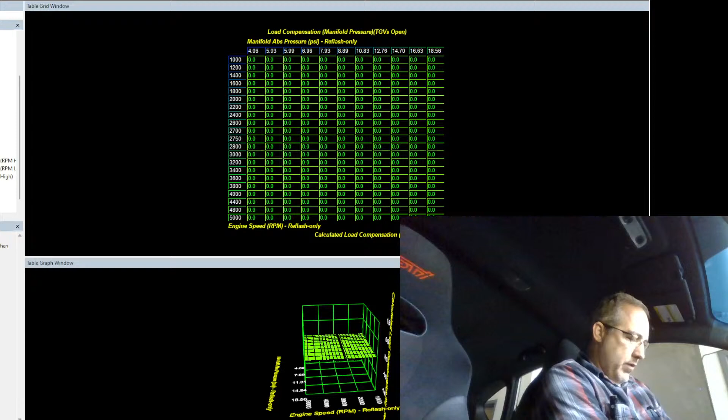Wow, my watch didn't charge last night. It says it's dead now. Okay. Hey, man, how's it going? Dino is one of the students in my Discord. So, welcome. I think you've only ever caught, like, what, one live stream before? And man, something's really in there. What time is it where you're at? Like, you're in, what was it again? United Arab Emirates? Is that where you were? UAE? Is that like 16 hours ahead of us? 8, 9, 10, 11, 12, or maybe 13-ish. I'm trying to think of what time zone that's in. But that's quite a bit ahead of me. Because what's 8 to Greenwich, and then yeah, I think there's like 5 more time zones to you, I think.

So, welcome. So this is like I said, 2012 STI. It's got just the Cobb stuff on it. Like that's it. Not a whole lot of stuff going on with it really, and that should make it fun.

2240. Really, that's it? Okay, so it's 11. 10 hours. Really, only 10 hours to UAE from here? Hmm. Okay, 10 hours. For my thermodynamics class. Nice. I wish I could read what it says. This YouTube thing puts this thing. First law analysis for engineering devices. Okay. Yeah, so my chat window has this emoji button, but it covers up what people write. So I often miss half what they say until someone else says something to push it up so I can read the whole thing. It's dumb. So GMT plus 3. Okay, right. And I'm 8. So that makes sense. So 11. Wait, but it's 2240. Oh, maybe because daylight savings. I think I'm 7 now. That makes sense. All right. Sorry guys about the phlegminess there. Something's really bugging my throat. I just ate, so apparently something I ate is getting at me. So anyways, here we are.

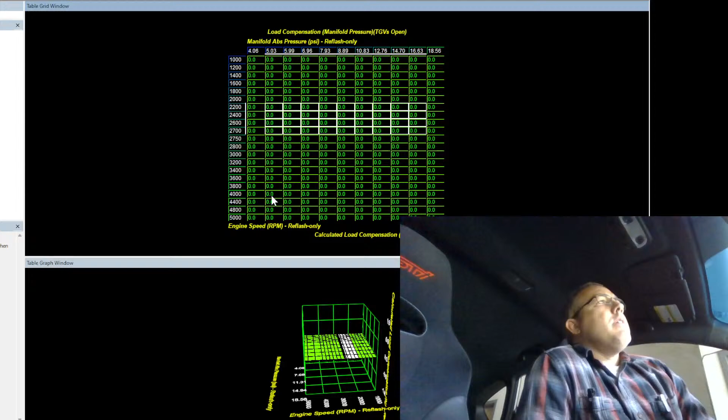But what's interesting though is as you change injector size, the RPM changes. So, like 1050s, the leanest spots usually like in the 28 to 3 range, and then 1300s, the leanest spots like the 22 to 26 range, right? And as the injectors get bigger, that spot kind of moves a little bit, and so the resonance is affected by that. And if you think about that, that kind of makes sense: if the injector is open for a shorter period of time, it's going to change the resonance. Now, I would think that a shorter period of time would be a higher frequency. How does that work? I guess the frequency is the same. It's just the duration of the pulse width.

So, anyways, yeah, it's interesting to think about the resonance in the fuel rails. But because this fuel rail has a large volume, and with the large volume, it also has the large dampers in the rail, and then also has a larger diaphragm and larger regulator, the resonance is pretty much a non-factor. Now, what I did find interesting though is for some reason this one has a fuel pressure rise that is higher than typical.

It's got a 4 regulator, and usually when you increase fuel pump speed on the 4, there's almost no increase in pressure. But this one there is, and it's like 7 pounds. So that's intriguing to me. It makes me wonder if it's the regulator or if it is the fuel basket, right? Because a lot of these that we put the regulator on have the Radium jet pump in them, but this one's got a factory jet pump in it with the 4 regulator.

So I'm curious if I was to log pressure in the return line after the regulator, if I saw that it went up, because I know that it does go up. I'm curious if that's the issue that we're seeing, why the pressure is not as steady as it should be. So that, or because this car has the regulator mounted to the driver's side rail. It was a different way. Lane wanted to give it a shot, so it's basically on the rail in one of the ports off the side of it. I think one of the damper ports or something.

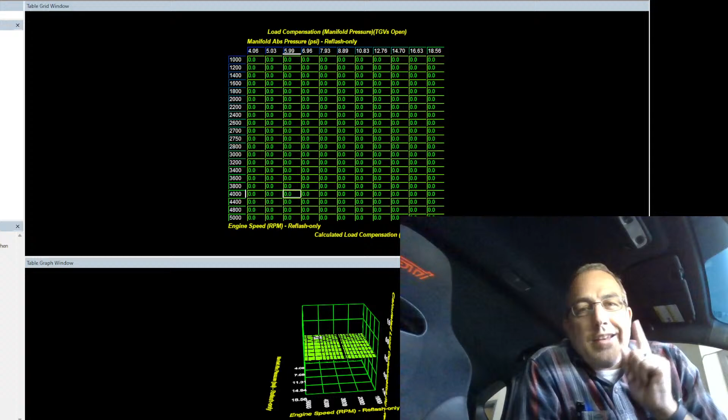I got a question. Anyone know how to log out of one email account on your freaking Google? I had a customer use my laptop. He logged in his email to get something, and now his email always logs into my shit. But the only option I have on Google is to log out of all email accounts. I don't want to do that. I just want to log out of that one and stop having this guy's email pop up on my screen. It's really weird. I don't know why these guys gotta make everything hard. They think they're making it easy, but they're making it hard. Really, in this modern age of convenience, things are really inconvenient.

Okay, so now in here I have a base map. Nothing fancy, just some regular values. I did forget to zero out the wastegate duty cycle though before I started this, so let's go to wastegate duty cycle and zero that out now. Zero that out. Like I said, this is a base map with some generic values in it from a previous tune, and we just want to see that everything is working.

Oh shoot, not even connected. I screwed all that up. Turn this off. Let me save this. Save that. That's one thing I really dislike about this Cobb system here. The fact that you have to disconnect to do certain things and reconnect to do other things, it's just super annoying. And then this whole thing, I don't know if you guys see the initializing tables, it's always initializing tables. When you're not connected to the freaking computer, the ECU is still initializing tables. It takes forever. It's so annoying. Now, that being said, it could be this laptop. This laptop, while it's new, has been very problematic.

One of the reasons that I haven't been streaming lately is I've been gone a lot. And I was just in Denver on a car, and the first day was effing miserable because my laptop would not talk to the Motec correctly. It just wouldn't do it. It was weird. I would have issues where all of a sudden it starts idling really poorly. I'm like, why is it idling so bad? What the hell's going on? I didn't break it. I was just checking this feature, and I can't find anything that shows me why it's idling poorly.

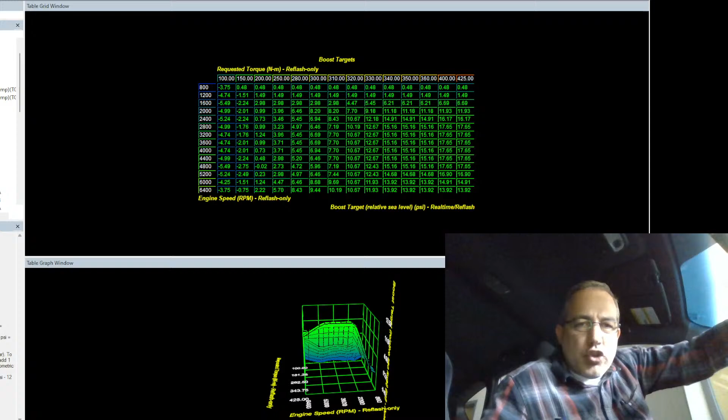Okay. Oh, I don't think you can see my log window. Let's see. You cannot. Let's see if I get the Cobb logger. That's not the Cobb logger. I get the Cobb logger for you guys. This one? Here we go. And then we bring this up. Why did they get rid of that button? I used to be able to click on it to bring it up. Now I have to drag it up. Ugh. There it goes. All right. I'm gonna slide this down right here. Like that. All right.

So I'm looking at this here. First off, it strikes me as odd that I have total trims of 5 point something. So that's the combination of my instantaneous correction and my learning. You'll see my learning is -6, therefore my instantaneous correction is like -1, and my total is -6, -7 now. Now that's kind of weird because I have the Cobb data, I have all that stuff in here for what this car has, and I also have the fuel pressure comp.

But the fuel pressure is only 0.1 or 0.2 higher than it's supposed to be. So I don't really see why I'd have 6%. Now I'm not too worried about 6%.

To be honest with you, I try and tune all my cars like 3 to 5% rich, because basically the idea is if something happens and it goes open loop, like an O2 sensor fails, I don't want it to be so close to stoich that it can be lean and misfire. So I do everything like 3 to 5% rich, so that in the event of sensor failures or issues, it just goes a little rich, and the car is not misfiring. They run really smooth and nice. And I let the closed loop system pull back that 5%.

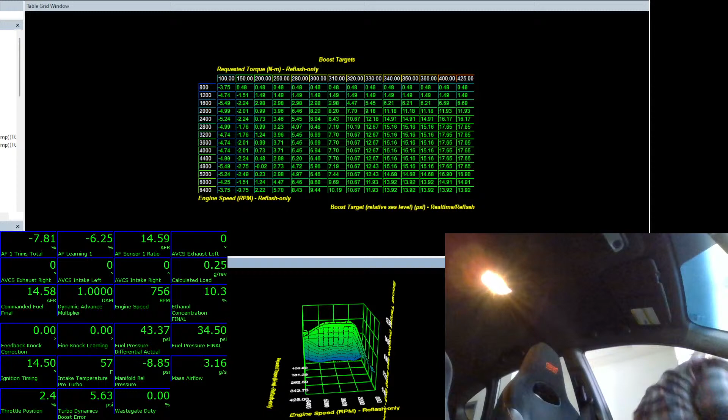Did I shut the front of this down? I don't think I did. I don't remember shutting the front down. Did someone else do it for me? Apparently I did. Oh yeah, I was talking to that kid on the phone. That's why he called me.

Okay. So you want to talk about conservation of energy? Somehow I am making more energy than I'm using in that person's world, right? And I'm pretty sure I've looked at the compressor maps and turbo maps of a lot of turbos, and not a single one of them was over 100%. I mean, that would really be something, right? Now, they've had vehicles with a VE over 100%, but that's for a supercharging effect. That's usually because there's resonance tuning associated with that.

But it isn't like, how do I say this? But you lose a lot of that, and it's usually in the realm of like 3% of resonance tuning is what you can get, like 3% more air fuel or volumetric efficiency. Well, that's rich right there. 12%.

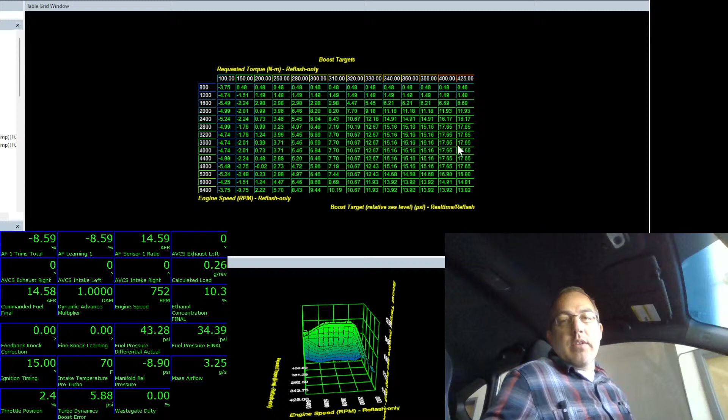Yeah, see, the log is fine. Fuel pressure is within half a pound the entire pull. Ignition advance is 12.5 at peak and 26 by redline, which is fine because we're talking a whopping 8.5 pounds of boost. Boost is 8.8 pounds at redline and 9.85 at peak torque. Again, we're at wastegate pressure on a stock turbo and all that, so that is good.

Throttle is 100%, but I'm still really rich. Okay, well, let's see. Did I check? Did I even bring out my open loop table? Probably not.

Open loop table is set to be 10-1. Okay, well, there we go. 10.12 at the top end and 10.5 at peak, between 11 and 10.5 at peak. That makes sense. Makes sense. Oh, other names popped up. There we go.

My mic is cutting out a bit. Fixed itself somehow. Maybe because it was clipping and I turned it down.

Maybe that's why. No BOV, like it's capped off. No, this has got a factory valve on it. Yeah, no, it was a freshly installed one. I watched Lane install a factory bypass valve in this thing, in the hose and all of that.

I was wondering, but I've seen a lot of discussion between people just not running any kind. Yeah, I mean, you can do it. You can absolutely do it. I mean, it's not beneficial. I mean,

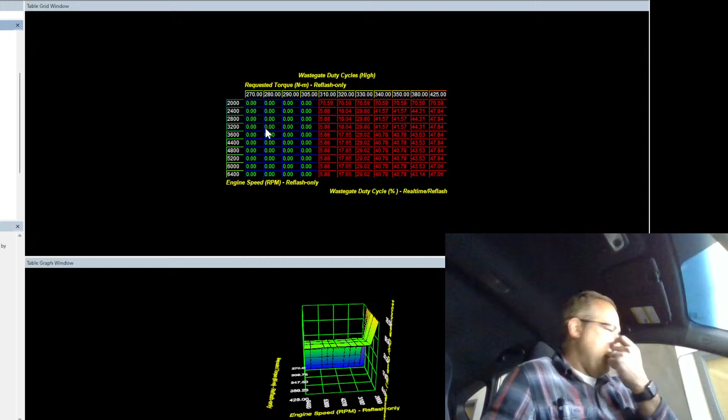Wait, I just got 8 pounds of boost, and I had my wastegate duty cycle. I thought I said it's 0. This says it's not, this says now it's 40 something. What happened? What's going on? Oh no, I don't understand what's going on here. Did I do that? But now I'm concerned. What did my log say it was? Wait a second, because that means that if it was at 40 and I just got 8 pounds of boost, something ain't freaking right.

Let me go find that log again. What do I do with it? Man, I got a freaking sciatic nerve pain going on. It is hurting. It is a hurt.

Holy shit, I hate Windows 11. Oh man, so bad. Where did my documents folder go? Just gone, we don't care. You need a documents folder? Who needs that shit? All right, it's not. Jesus fuck, did I say I hate Windows 11 yet?

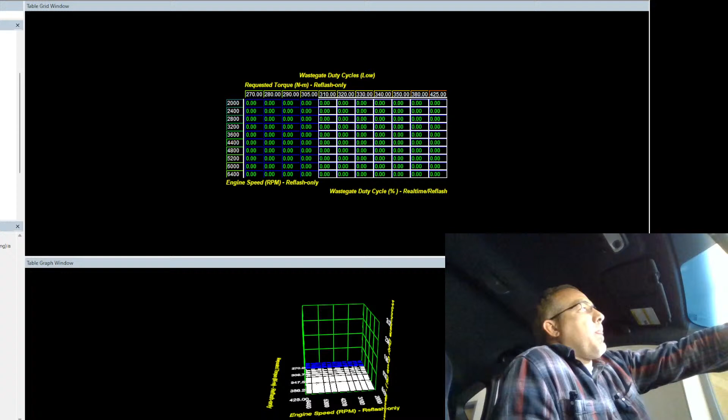I'm a little disgruntled lately. I feel like I'm in a fucking hell loop, to be honest with you.

I did another podcast with Flatirons Tuning day before yesterday when I was there. Real short one because I had to catch a flight, and we were talking about some cool stuff. I thought I disabled OneDrive in 11, but I don't know how to fully disable it because they don't want you to, so it's just fucking miserable. But yeah, so I'm at Flatirons, I did a 45-minute podcast with them, and we're talking about the industry, engines, and all that.

But at the very beginning, I said something I've been keeping to myself for a while, and I want to talk about it a smidge. I do not like how fragmented our industry has become, how it's turned into all these little factions of misinformation and ego. I am actively working to bring some unity back to it. I don't know if it's going to work. I know society is becoming very fractured and kind of broken.

Facebook has pretty much single-handedly ruined the car community by taking away from forums. If you think about it, before, if I wanted information on a Subaru, there were a few forums to go to, but the obvious one, the largest one, was NASIOC, North American Subaru Impreza Owners Club. You'd go there and say, I want to know about my turbos.

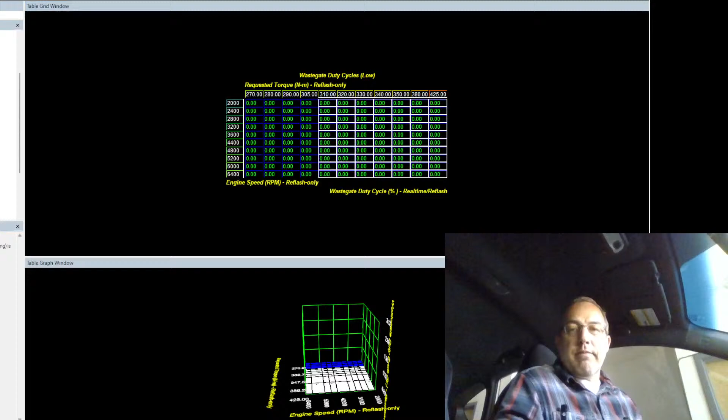You know what, I'm gonna take this duty cycle and go really high, just real quick. I'm gonna give it a little bit of throttle and see if my boost even goes up, because the fact that I had basically wastegate pressure at 39% wastegate duty cycle makes me feel like my wastegate's not getting power. And that's where that part of the hell loop comes in too.

Every car's got a freaking issue for some reason. Oh, I got 12 pounds. Wow, 38% gave me 9 pounds. That is concerning. So does 100% give me 12 pounds? That is also concerning.

Wow, okay, why is that not working? God damn it, fuck you, Windows. Oh, apparently it didn't register when I hit it. Let's try it again. Log. There we go.

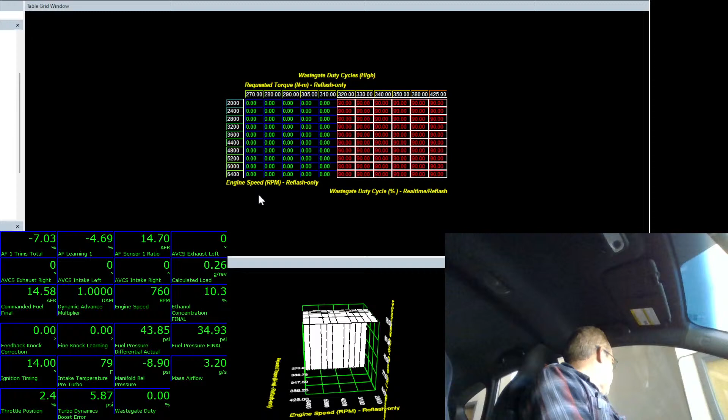Wow, that's not beneficial. Alright, so clearly I have a boost leak. I don't know how bad it is, but clearly I have one, because I've got 70% wastegate duty cycle and I'm hitting 12 pounds of boost, and my air fuel ratio is richer than balls. Here's 70, 67, 69. To get to 14 pounds, that is a lot of duty cycle only at 14 pounds. And I realize it's the factory boost control solenoid, the factory boost control lines, so it's not going to be the most responsive setup, but that definitely concerns me.

Fuel pressure final, fuel pressure looks good. Yeah, okay, let's look at my math. Let's see if my math is off. Maybe it's not. Let's see what the math goes to. Oh, 247. And what did we make? 205? Yeah, I made 205. And it said 247 for my airflow. Now, 247 at 13, was this 14 pounds? Where'd it go? 14 pounds at 6,500.

That's actually not that far off, honestly. That part's not that far off. Still kind of trying to figure out what the hell's going on, though. Commanded fuel was still 10.5. Oh, that's right, because that wasn't connected earlier. Man, that seems like a lot of duty cycle to get no boost. Something's not quite right. That is for sure. Let me do a few more changes and take a few more logs and see what we get. Maybe I'll figure something out.

First, I'm going to do the fuel. Because like I said, right now my fuel is pegging out my air fuel meter. My air fuel meter only goes to 10. So, it could be 10, right? It could be a little bit above that, a little bit below that or something. So I'm just going to lean this whole section out. Just going to do a little smoothing action on it. Boom, big and ugly. Block tuning. Let's do some block tuning here. Leaning that a bunch. All right, so leaning that a lot. And let's see where it goes in the end.

It's not correct. Obviously, you see there's a big dip in there. There's a big hole at the top. All of that. It's not a well done fuel map. We're just trying to figure out what's going on here. I just want some data so I can. Oh wait, I think I heard a hiss. Yeah, I think I heard a hiss. Not a big one, but a little bit of a hiss.

215 it said. So 215 wheel horsepower is what I'm getting at the wheels on that last pull, and my mass airflow was 247 again. That's a big difference. I like that it was consistent though. It was 247 twice in a row. So if there is a leak, then it is a small consistent leak, like a hose not connected or something like that. A small hose. It's not gonna be a big leak. It's not gonna be an intercooler, end tank, or any of that kind of stuff.

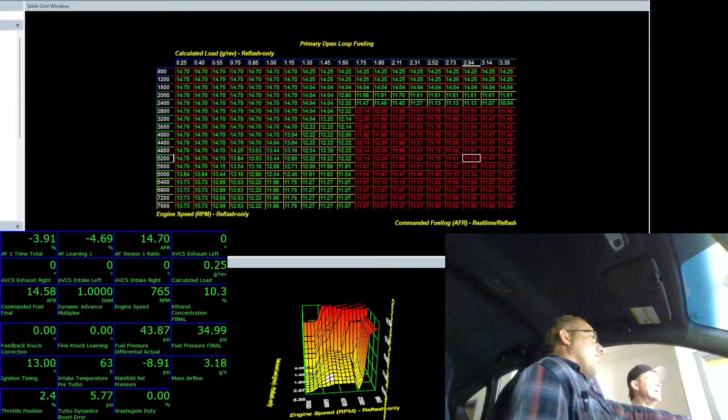All I did is pull the manifold off, pull the fuel lines off, and put the manifold back. Okay. I'll check it here. Injector? Maybe. I mean, no, because it would misfire at idle too, and it's not. No, he means like injector O-ring on the outside for the atmosphere. So I don't know. Talk to the guy. Think about something to come back.

Mark says, I think one of the big issues with how media generally is based on clickbait, with influencers trying to outclick each other versus just doing good, consistent work. Yeah, but you shouldn't be going to influencers as your primary source of data. You know what I mean? I guess it depends on the data. Right now, you can ask me a question and we can talk about it because I'm live streaming. But most influencers don't live stream. Most influencers are there for clickbait, but they don't also provide all the data, right? I don't know. I feel like it's just a matter of the database is corrupted, doesn't exist anymore.

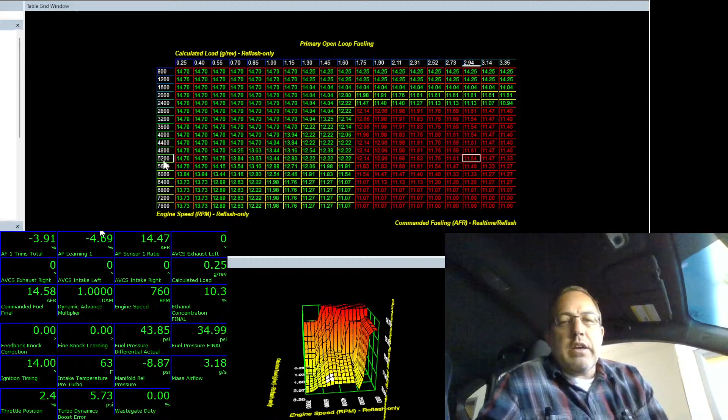Now again, this does have the factory boost control solenoid, so it does take a little bit to duty cycle through stuff. But I've got my fuel map here. I'm gonna check a few things. Let's see. Ethanol says 10.3. Injector scale is 2658 at 0%, which puts it at 2764 or whatever at 10%, which is where we're at. Latency is correct. 14 is 0.92.

That is correct. MAF calibration. It is an SF. It goes to 501. That's correct. 103 here, 501 there, and the smooth curve. Yep, that's an SF cal.

Those are the biggest sources of fueling, right? Immediately right off the bat. Let's check. Minimum's 0.4. Well, that wouldn't affect us on the top end. And it looks like the right curve for my small pulse width. That's all normal there. This should be zeroed out. That should be zeroed out. Up top, it's not zeroed out on bottom, so I need to zero that on the bottom too.

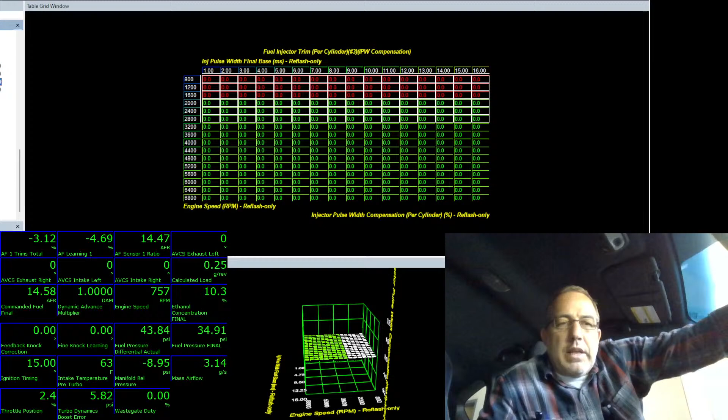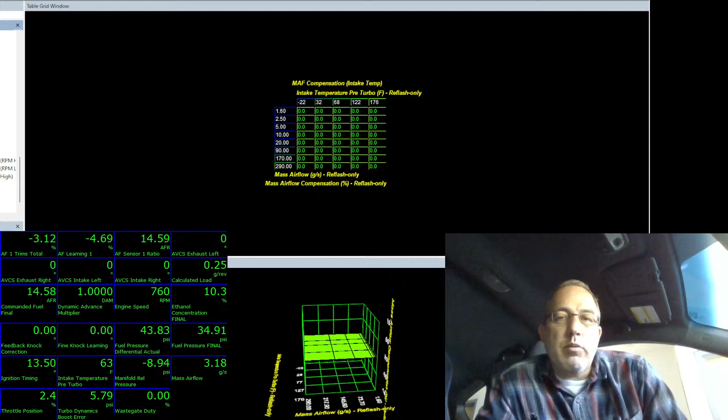I realize the significance of saying you shouldn't be relying on influencers to get your information, and then people ask me stuff. But I wouldn't consider myself an influencer by any stretch. And I've been here the whole time just to provide a service more than entertainment. Yeah, I've got a couple funny videos, but overall, comedy and click stuff isn't my primary method. I mean, I wish I had a larger following, and I wish I had more reach than I do, just so that I could help. But my motivator for doing that is to help the community and this information versus just to destroy things to get rich.

That's one thing I hate about some of the influencers, like they claim to be car guys and then they'll just ruin stuff on purpose for the clicks. And that to me is just so hypocritical that I can barely handle it. Like, what's an example? The Whistling Diesel guy that throws the engines on the hood of his R32s, and ruins two R32s because he didn't like the cars or whatever. That shit made me mad to watch, you know. And unfortunately, I fucking watched it.

So I contributed to their clicks, their watched minutes and that kind of stuff, which made them money and made it more likely for them to do it again. Which is why they do it, right? And because of that, I try not to watch that guy's videos. Sometimes there'll be a clip, someone like, dude, you gotta fucking watch this, and I might watch it. But for the most part, I don't support those people that behave in such a way that I think they're damaging our community personally. So I don't sound like an old grandpa or anything, but I wish that I could better reach people and educate people.

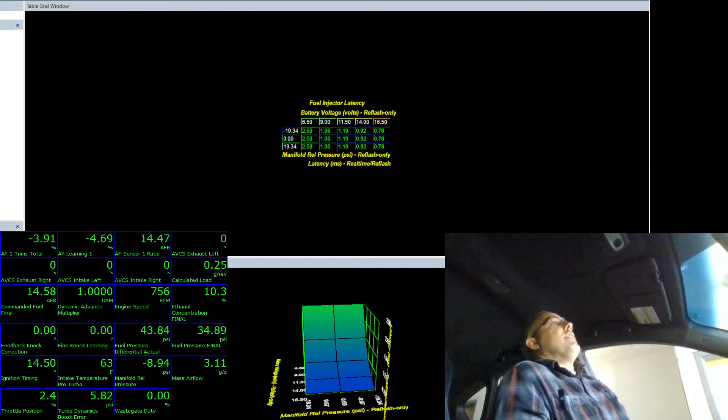You know, I smell a loose leak. Yeah, me too. Tom is an educator. There you go. More than an influencer. I try. I try. Obviously, I'd like to. You know, I wish I was funnier. I mean, I'm funny when I'm drunk. I think. At least I think I am.

But obviously, when I'm doing this, I'm focusing on giving my customer the best results, right? The best product that he or she can get, and that I can provide. That's always my goal. So right now, even as I'm blabbing to you guys, I'm thinking about this car, trying to think of other things that could be causing it to be so damn rich. It's just 1050s. Fuel pressure is correct. Everything is good, so it just seems like there's a leak somewhere. The problem is it's a small one, and probably not going to find out by looking at it. Probably got to pull the...

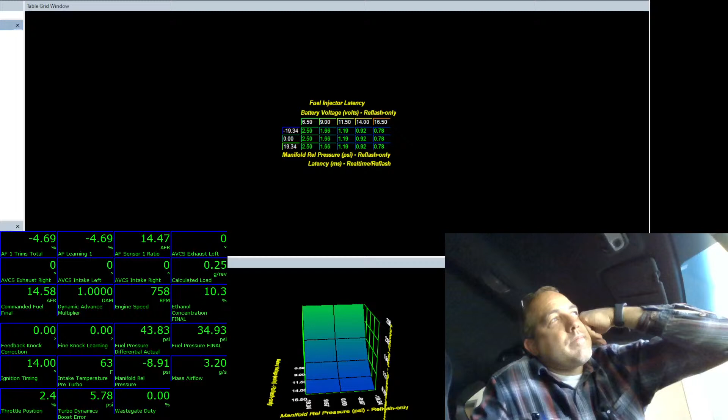Oh my god, this has a fucking inlet. That's right. It has a turbo inlet. That's really shitty. It has one of those Fuku racing ones. Ugh, so bad. So fucking bad. It puts the bypass valve hose all fucking kinked off, which is why the turbo surges a little bit. I think I'll get the smoke tester. God damn it. This is my hell loop. Working on cars that are fucked up. Dealing with this shit all the time. It's my loop. I just want to do cool shit, and I don't get that sometimes. I get to do stuff that has issues instead.

Now that being said, obviously it's not the fault of the guy who owns this car, whoever that is. I don't know anything about him. I just know that Tier 1 asked me to tune a car, and that's what I would do on this day. So I don't think the car is neglected or anything like that. I got to cover my ass, make sure that you guys know that I'm not saying screw this guy or anything like that. I just don't know why it is that there's always something wrong with these damn cars.

And I guess part of it is that unfortunately I care, right? Because a lot of tuners would be like, "Oh, that's off, okay," and then tune for it. You know, they tune for that leak, they tune for what's not right, and then they go on the internet afterwards and they go, "A true tuner makes anything work." No, no, a money-hungry con man makes anything work.

Somebody who cares about the product and their customer and doesn't want them to go broke because they got to replace their motor won't make just anything fucking work. He'll make the right thing work so that the car is more reliable, safer, and easier for them to operate, has good hot start, restart, has good cold start, has good throttle response, gets as much fuel economy as this setup is capable of doing. Not chugging off the stop sign, all that.

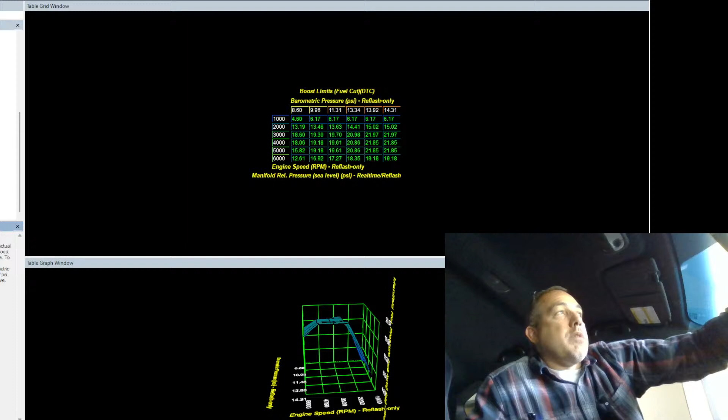That's what a fucking true tuner does. Money hungry fucking liars make just anything work. And yeah. Sorry, that's my little rant. One of the guys who considers himself the hottest thing since sliced bread, he said that shit on Facebook one day while posting a video of some car that I'm pretty sure I rejected because he had really bad component choices and shit, and who I'm pretty sure shortly after is paying for an engine build. So, yeah, a true tuner makes anything work for 2 minutes.

All right, I'm gonna go get the smoke machine and see about smoking this car. See if I can find a leak. Let's see, I disconnected. That's good. That's good there. Okay, so I gotta take the intake back off again, hook the smoke machine up, see where smoke comes out, hopefully find a leak. If not, we don't.

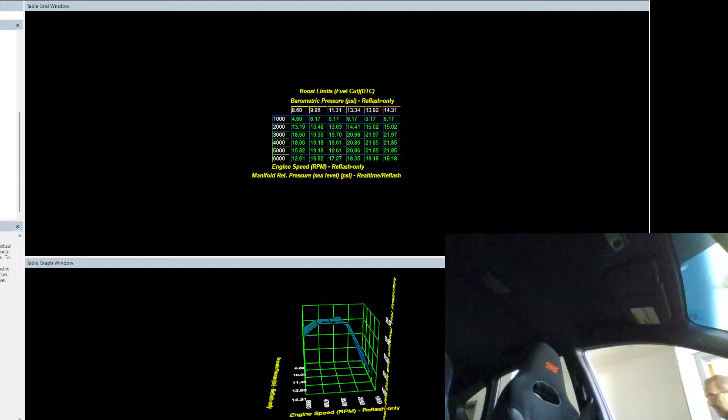It did come up nice and snug, but it was a little deep. Motherfucker. Worst thing I said was goddamn it.

All right, so let me modify the mods list now that I know that it has a 3-port. That's possible. It has a Cobb downpipe, which I wasn't told about. It has an IAT relocate that I wasn't told about. Luckily, none of those things hurt it. Now, these are 1050s, right? Not 1300s? Okay, just making sure. It's 3-port. Okay, turbo inlet. I knew that one.

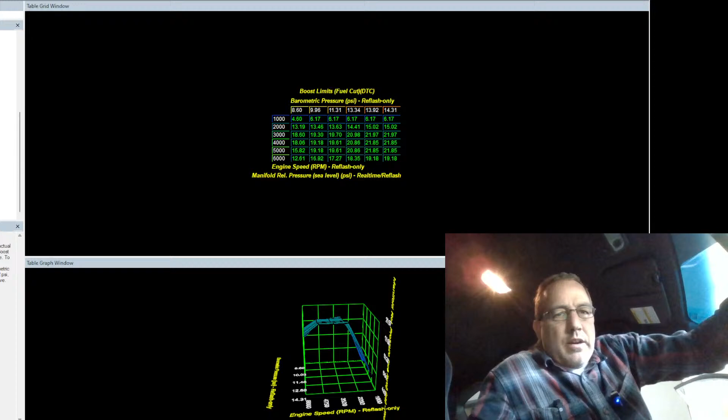All right, so definitely fucked up. To have a 3-port and need 70% to get 15, that ain't right. Especially to need 40% just to get 9. That ain't right. So all of that's fucked. So he's gonna smoke test it right now. But while that happens, I'm gonna go here to my wastegate duty cycle and change the duty cycle of the valve to be 20-some percent.

Boost control. Why is this one open? I don't want you open. Frequency. Boy, this software is the worst. We're at 28. Save. Okay. And then it's a GM IAT? It's the big brass one?

Another question too. Uh-huh. Did that guy with the Skyline, like Vlad or something, or Polowski or something, reach out to you? I feel like somebody with the Skyline asked me some questions. R34, like about a month ago. Yeah, a while ago, yeah. Never heard back. I know I responded, but... He's getting tuned right now down at KO. Did he go to the wrong place? He called us and we reached out to you. Now I'm wondering why. Yeah.

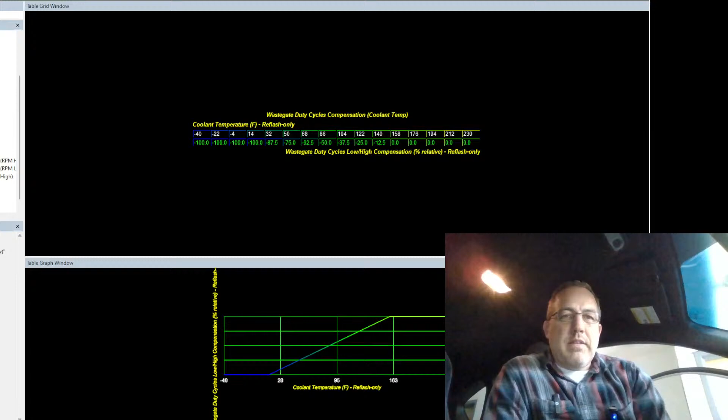I was just wondering if you complained about price. Probably. I mean, my guess would be... oh, he must have called me, not via email, because I don't see an email from him. Yeah, maybe not, maybe he never called me. It's all right, his loss.

That's fine. Yeah. He's not doing it? Too much money? Oh well, I gave him tons of options. I think the whole thing was too expensive. He was hoping he could get it done for like $3,500, and it was like 52.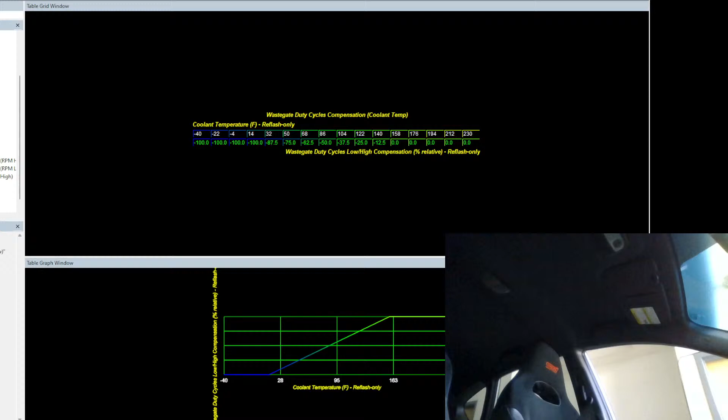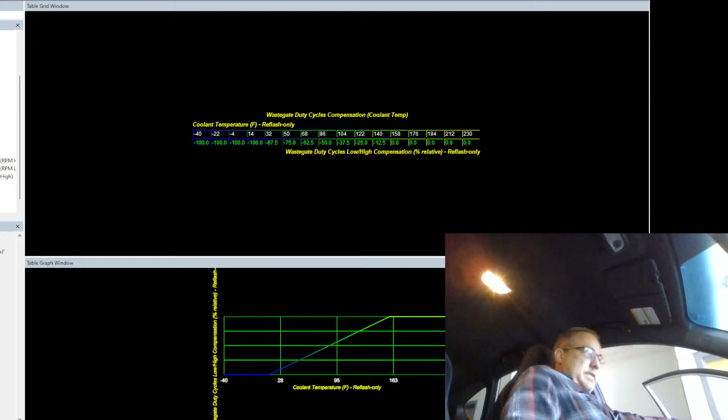All right, well for some reason there's no leak. So that's pretty crazy. It seems like a lot of not good stuff happening simultaneously that would imply that there was a problem.

All right, if you're still here, do you have the scale IAT from stock? For this sensor, yes, for this one you do, because it's a GM one and not my sensor.

Sean Tierney, if you're still in here, dude, how you doing? Dude, you gotta message me or call me or something. I know I'm old and all, but we used to shoot the shit all the time. Let's see. I wonder if Sean has my new number, that's actually something I should double check. I only have Sean's old email address, I don't have Sean's phone number.

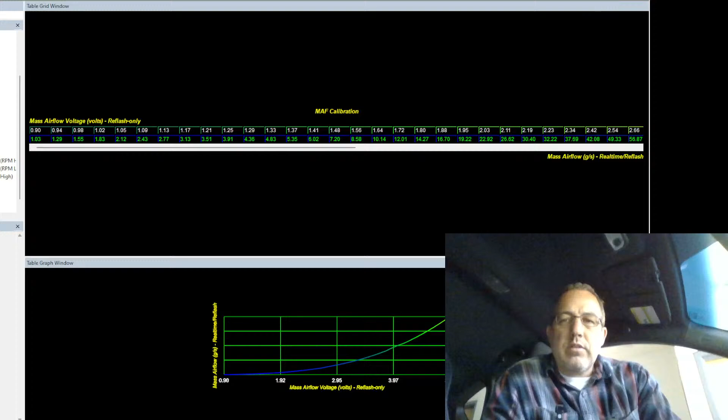Does anyone have a MacBook? I'm contemplating buying a MacBook. I'm so tired of Windows and it's gotten so freaking bad, I'm honestly thinking of going to a Mac. But I know a lot of the stuff you can't run on a MacBook, so I'm trying to figure out what I would need. I think, from what I don't know of them, that I probably need like a MacBook Pro or something with a dual boot, then it's still fucking Windows. I don't want that. So I gotta figure out if these programs work on Mac or not.

All right, let's flash this with these changes. emtron.world, well that changes. Downloads, see what they say. Just says installer. It didn't say anything about being Mac friendly or not, so I'm assuming that means not.

Do they use Macs in Australia?

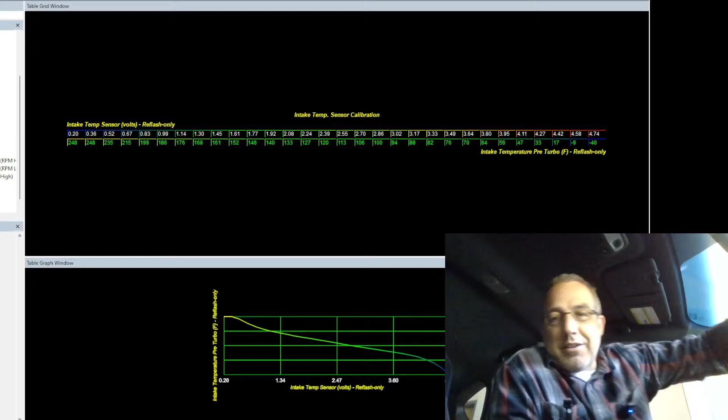He said dry sump instead of power steering pump kit. Okay, so you want to get rid of the power steering and put a dry sump there. That's tough because that part of the manifold is closer than the other side where the AC is. That would be like a stage or two, or... ooh, oh, hold on a second, hold on a second. I see, but here's that money aspect again.

Do 2 stages behind and 2 stages in front of the belt. No one's done that yet. And my system is modular enough, I could do that. The only issue would be getting the pulley on. Yeah, that would be hard. Getting a pulley on would be hard.

I would have to make a pulley drive that was custom and larger than my current pulley drive, because right now it's the small end of the shaft. But if I put a hex drive on it that slides on with a big hex drive, and made the pulley have a hex in the middle of it so it slides on, then I could assemble the pump and have the pulley on there, a hex drive, and then just have a screw through the side, a set screw to take up the slack, maybe through 2 faces so I get 2 axes on it. But yeah, I could do 2 stages on either side of the belt.

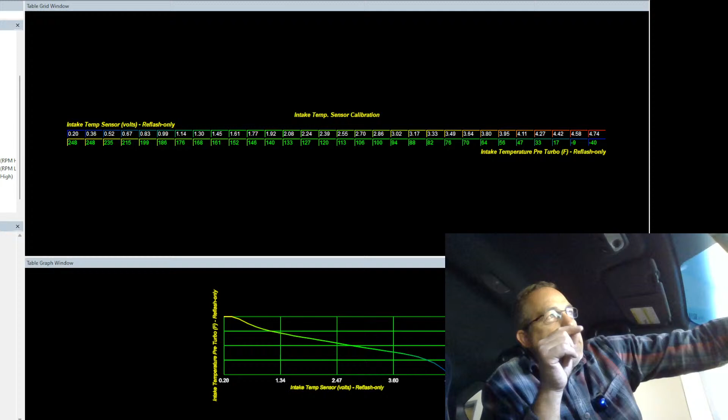That's actually really cool because that reduces my bearing requirement. Right now you have the load pulling on the end of the shaft, and all the gears are being pulled up, pivoting on the bearing in the front, so it has to be the bigger, stronger one. Actually, in GM power steering pumps, there's only one bearing in there, and the pump floats on the back, and the rest just sits on the bearing. But if I did that and had the load on both sides, I wouldn't need as much bearing in one spot. I'd have bearing on either side, and the other stages could float, because there wouldn't be any pivoting about that axis. I could just do one bearing on either side of the shaft, and the rest of the stages could float.

I don't know. Where am I at in this flash? I probably should have forgot about that. Key on position, being reset. Okay.

I thought I did. Holy fuck, it's the longest reflash ever.

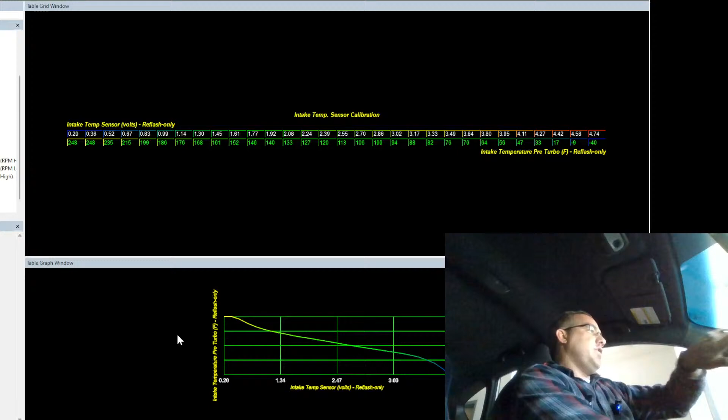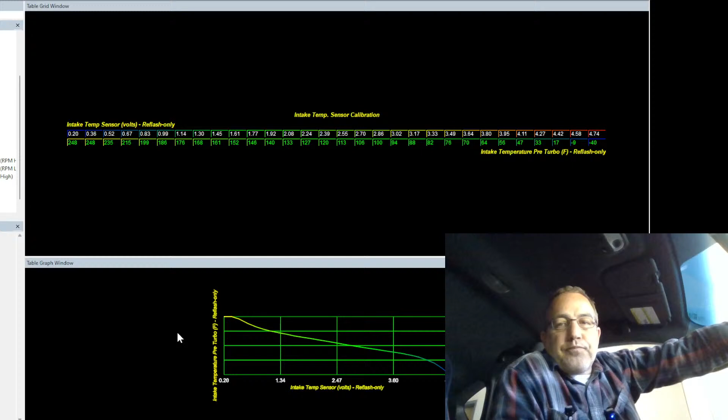I wanted to tune this car and be out of here by like 2 o'clock. I showed up early to do it. Car wasn't fucking ready, like they never are. So an hour and a half I was in here before it was ready. It's fucking annoying. That's my hell loop - the cars aren't ready, I show up.

It was running kind of funny, I think, because of all the smoke in the manifold, so I gave it a little rev. Now it's smoothed out, quite a bit smoother, so that's good. Because there's also the crankcase full too, right? So it's coming in through the PCV system as well.

I don't know if you heard when we were doing it, there was a ton coming out of the oil fill cap, which coincidentally is technically a leak. The PCV is drawing air that's unfiltered through there, so it's a leak.

The thing about that is it should have made the car leaner, and I should have had a positive correction, not a 6% negative correction. So that was an interesting one, considering I'm looking at it now. It looks like the correction's going in the same direction - it'll eventually be negative again. All right, so I'm just going to pull off the entire MAF calibration.

I don't know why I have to do this. Maybe it's an issue with this new sensor, or maybe it's just... I don't know what it is, honestly. It's silly, there's no leaks. The regulator's holding pressure good, I can see the pressure. The mass airflow sensor is brand new.

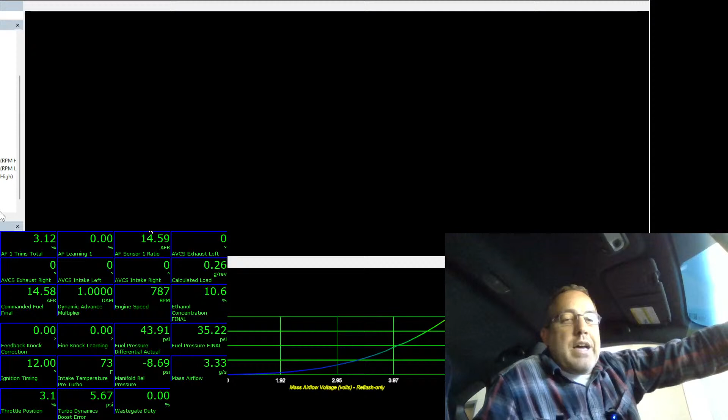The injectors are new. My guess, honestly, is that these are at the high side of the flow that they have, right? Because every injector manufacturer, every product manufacturer has an allowable band that the product has to be in before it's acceptable. So you have to have a range. And so Injector Dynamics has two ranges - they have the range that they flow to be acceptable. It has to be a flow rate.

And that flow rate can vary. I don't know their band. I'm just going to say 5%. But then they have another band, and that's injector to injector - 2 or 3%, I think, right? I forget what they said it was. It's 2 or 3% in the low pulse width areas and a smaller percentage up top. I don't remember what their specs are for that - they said something about it before.

I don't remember, but like I said, technically they have 3 bands. The low pulse width characteristics, because that's the most important part of an injector as far as how it's going to idle and drive. And then, of course, the top end flow, so you don't melt something down because one cylinder flows less than the other. I don't know what their top end flow limit or acceptable range is, but I remember hearing 3% for something versus 2% for something else. So, all right, you see, I pulled 5%. I pulled 7% out of the MAF cal, and those numbers are a lot closer to 0 now.

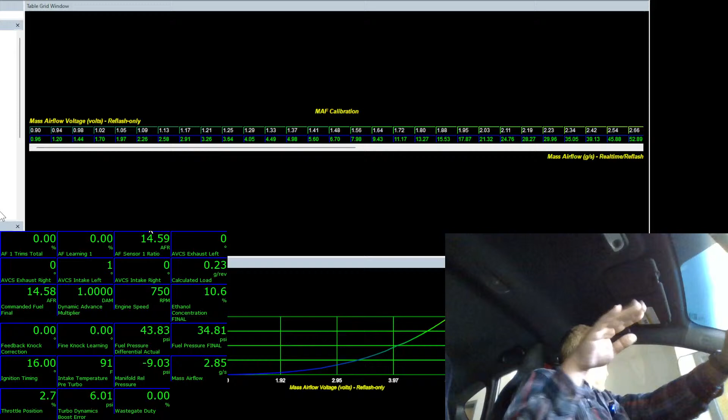So the air fuel is exactly where I want it. And coincidentally, where the boost is at 0% duty, with the way the scaling is in the dyno, both lines were on top of each other. It was 2 lines, they were just riding each other the whole way across until 6,000 RPM when one of them went down. I don't know which one it was. Air fuel. Air fuel went richer over 6,000. That's what I saw there.

All right, so we're leaner. That's good news. Okay. Commanded fuel was 11 something and 12 up here. And it was really close to that through the whole pull. So that's good news. Let's see. Wastegate duty cycle 0 the whole time as expected. Okay, that's good. Mass airflow got to 180 now that we've pulled 7% out. 180. And it made 176 wheel horsepower. Hey, look at that. That is tracking now. That is tracking. Okay. Fuel pressure differential was the same through the whole pull.

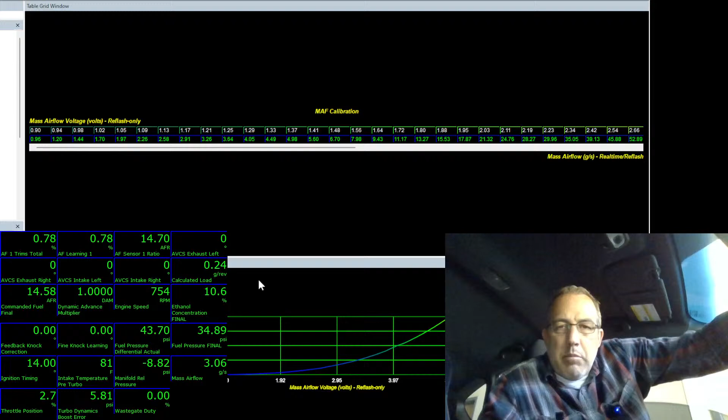Timing here, let's see. Redline 6,800. Timing was, wait, what's going on here? Timing was 30 degrees up there, but only 7 pounds of boost up there. And then at peak torque, timing was really conservative, 7 pounds of boost at 14 degrees. So really conservative on the bottom. But up top, you see the timing went really high. So what that means is that the calculated load was so low that we just fell off into here in this area, probably this 1.7 area. My guess would be 1.75.

Look at the log again and see what it was. I forgot to look at what happened. Okay, well, it doesn't exist anymore. This is the wrong one. I closed it. What's this one at? This one has calculated load on the top end. This one is 2.1, but this was 14 pounds of boost. Okay, so yeah, probably right. Probably about the 1.7 range right here. No knock, so that's good. And everything was good. So okay, let's add some duty cycle to it and tune it like we want.

I actually copied this map earlier. Did it save? No, it did not. So we're usually around 75 right here. And then in this range, we're going to be 350, 380. Okay, right here, we're going to be right around the 368, like so. And I'm going to taper it down to, let's see, let me look at the boost request. Oops, so 310 is gate pressure. So 310 will have 0%. There's no point in having duty cycle when I want gate pressure. 320 is the first step where I'm going to have wastegate duty cycle. So I go here, 310. This is 0, not 15.

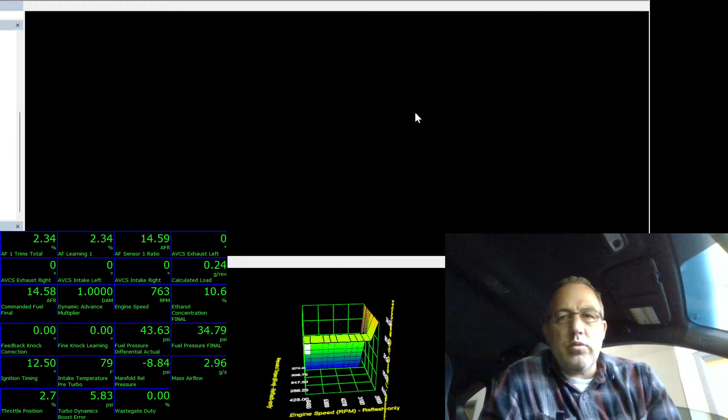Now what you can do is give it a few percent, like 5, so that things can be a little more responsive. I hit R instead of H because I've been doing too many Mtrons. And then low. We'll do the same sort of thing. 75 here. Sure. And then this will be a lower value in the first two cells. We'll do 55. And then 310. We'll leave this at 5 as well. That just kind of lets the system be a little active. And then we'll straight time that for now until we get deeper into the tuning of the boost.

They're kind of refueling. Oh my god, why do you do this, Cobb? Like, dude, I fucking hate that. That part is so annoying. You save something or whatever, and then it jumps around the menus on the left and puts you in a different spot. It's the strangest shit. I don't understand why they do it. I don't know how the fuck they get away with half the shit they've been doing with software lately. It's been just a nightmare to work with.

Yeah, one of the guys I was talking to was like, "Don't these people use their own software?" And I was like, "You'd think so, but fuck, you just never know. Sometimes things get so messed up, and you're like, how is it this bad?"

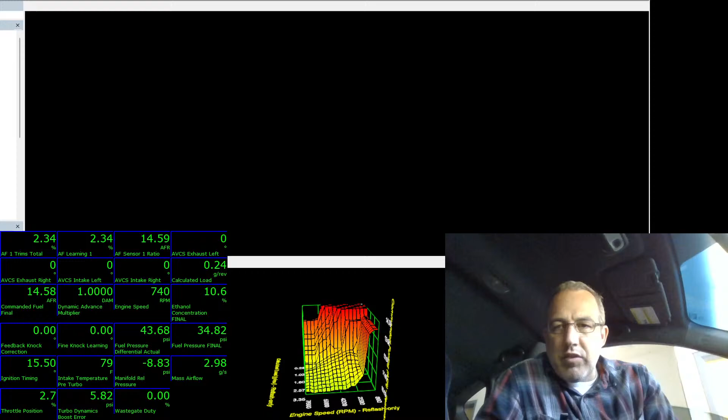2 stages in a large tank, moving the battery, and electronic power steering. What do you mean larger tank? I mean, you gotta have a tank anyways, right? What do you mean larger tank?

I saw DAM drop for half a second. The half a second I saw knock. Okay. I didn't see knock. My log didn't show any knock. It was zeros all the way down the log. I looked at it. And DAM's still one. I don't know what you're talking about. Did like mid pull, did it drop for a second, go back up? That'd be weird. That'd be weird.

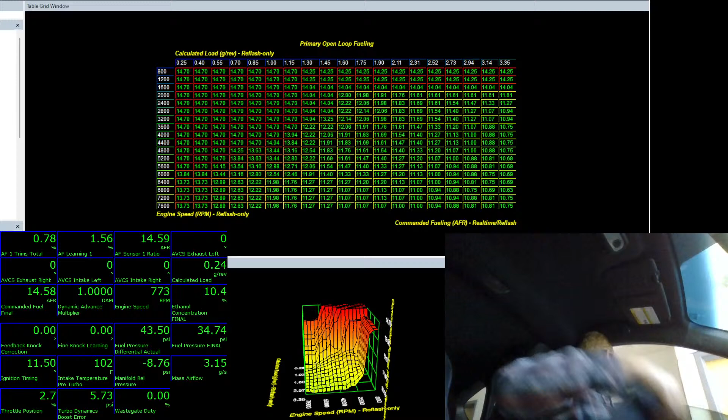Alright. That made 215, which is jacking shit. Air fuel, though, was in the right spot. That was basically 10.8 air fuels, from 11 at 3,000 to 10.8 by red line, hovering around 10.9, 10.8 through most of the power range from 4,000 to red line. Okay.

Check my cams. I know you can't see the logs, so I'm just telling you what I'm doing. First, I'm scrolling down the log and verifying my cams were moving within the same or a few degrees of each other during the pull. I go next over to calculated load and I scan down that, make sure that makes sense. And then I'm using enough of my timing map that I'm not doing a bunch of unused stuff unnecessarily. Right now, I have a bunch of unused stuff unnecessarily, because the calculated load only gets a 2.3 on that pull.

2.3 with a pressure, looks like 13 pounds. Yeah, 13 pounds of boost on that one, which seems ridiculously low to me. 215, 216, 219 in one little spot. It says it goes 15, 15, 15, 15, 19, 16, 15, 15, 15, 16. So that 19 is just a little glitch, obviously. And that's a 64% duty cycle. We're 2 pounds under target. At 64%, man, that is just so much duty cycle to make no effing boost.

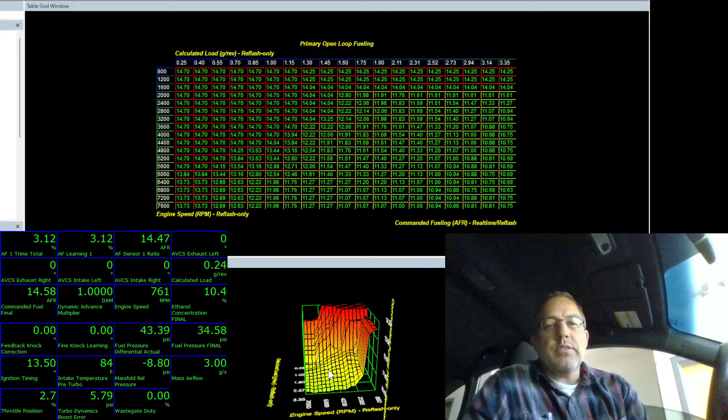Feedback knock, fine knock, stay at all zeros, no DAM drops. I mean, if it dropped with 12 degrees on it, I'd be concerned. And then, obviously, like I said, 11 to 10.8, and that is post-catalyst. So that means technically it's probably a little richer than that through the duration of the pull. So I still don't like how much duty cycle it's taking to hit these boost targets. I don't like that at all. But apparently, I don't get a fucking say in the matter. It's just going to do what it's going to do.

It's laggy too. Full boost happens late, at 4,500, with a 68% duty cycle across the board, and the log showing me at 64% the entire pull, because I was less than my target boost by 3 pounds or more the entire pull. I really don't like that. I don't like that it has to be such a high number. It doesn't make sense. It's not good. But like I said, we checked for leaks, and there were none. I'm just gonna keep raising this up here.

I do know that it took 64% or 60 on this map to hit 14 or 15 pounds. So basically, I have 340 torque, 15 is my target, 360 torque, 15 is my target. So I know that from 340 to 360, all that really needs is 64%. I say all it needs, but that number, now that I have it, is great to put in the 340, 360 range, which is right here, which is insane to me. I got to go that high. So that's 65 now.

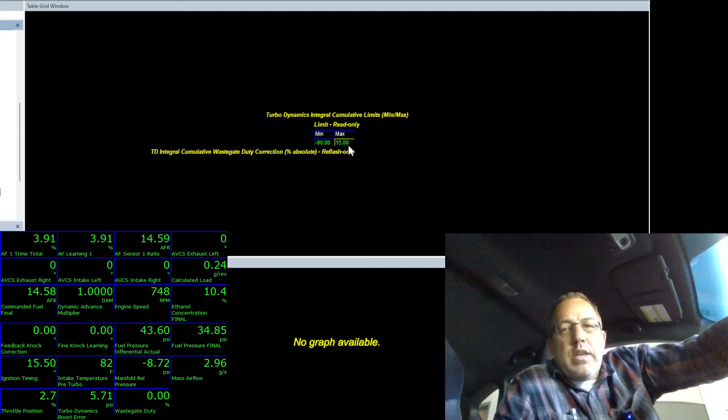And if that number is less than my high table, well, that's what I still get. The high table does not count in that regard. So it uses whichever one of these is lower as the limit. If the high table is less than that, then the high table is the limit. If this is less than the high table, then this is the limit. So that's just how it works. All the other compensations happen, but still get capped off at that number, is what I'm trying to say.

With the exception of, which one is it? Remember which one? Some of the compensations make it through. Come in at the end, take it off the high. I think it's elevation, barometric. One of them comes off the end. Look at that curve. That is not advantageous. That is not what I want.

Well, I know that for 9 pounds it needed 30-something%, and I know that 320 is a 10-pound target. So I'll do this number, and that'll make it hit that other target. I have the same thing here too. I need a 38 for the 9 pounds, and this is 10 pounds, so I did that. No, I don't like that. I don't like that that's the kind of fucking map I have to do to make this thing work right. Wow. Okay. Well, that's what it takes, I guess.

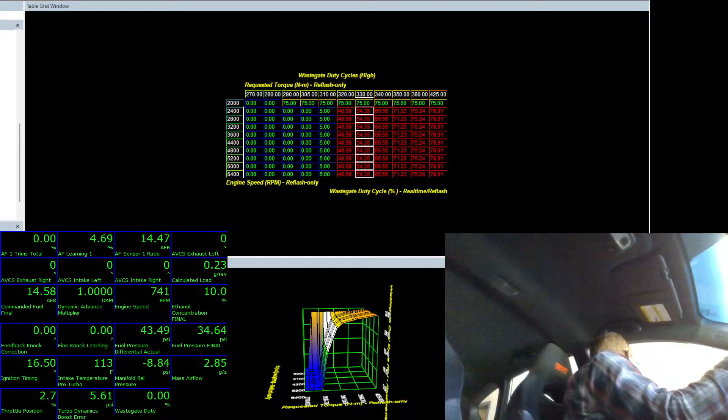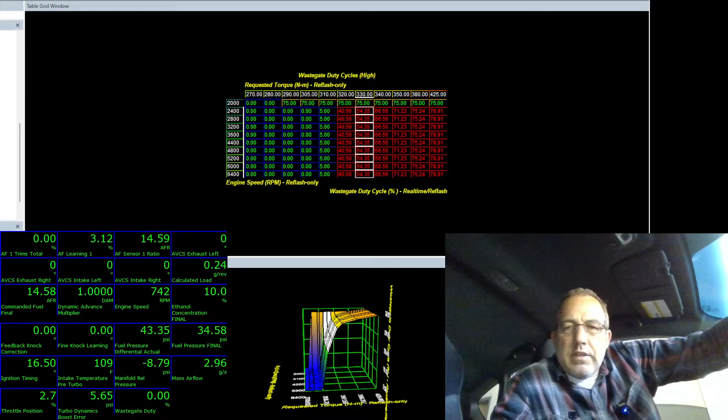Let's see, turbodynamics. Okay, we get to within a pound and a half until the top end. So it isn't until the very top that we make it to our boost target. And our mass airflow hit 225. We made 230. So yeah, it looks like we're hitting our airflow numbers, but we're not hitting our power numbers at all. It's the same air fuel, basically 10.8 across the board. And yeah, full boost at 4,500 RPM. That's insane, right? Because this is a factory VF turbo in here.

Feedback knock count, fine knock count, zeros all the way down the board. DAM multiplier stayed 1 all the way down the board. Commanded air fuel finals: 11, 11.3, 11.3, 11.3, 11.1, 11.1, down to 11.1 is as low as it gets on the commanded fuel, but as you saw, it's getting 10.8 at the tailpipe. Peak load at that time is 2.6, so we're getting up there on our timing table as far as our peak load is concerned.

And then our differential fuel pressure is a steady 44 psi the entire time. It's 43 at idle. When the other pumps kick on, it goes to 44. So that's nice and steady. No issues with that. Timing again, peak boost still hitting that 12 number. It's interesting because I added some boost. I don't know why it only went to 12. Oh, because it didn't hit peak boost till fucking 4,500.

That's why. Yeah. And then at redline, 22 degrees at 13 pounds of boost up top. So it's not extremely conservative. It's not super aggressive. It's on the conservative side, but I could probably add 3 degrees across the board, maybe more, with the way this is running, and it would still take it.

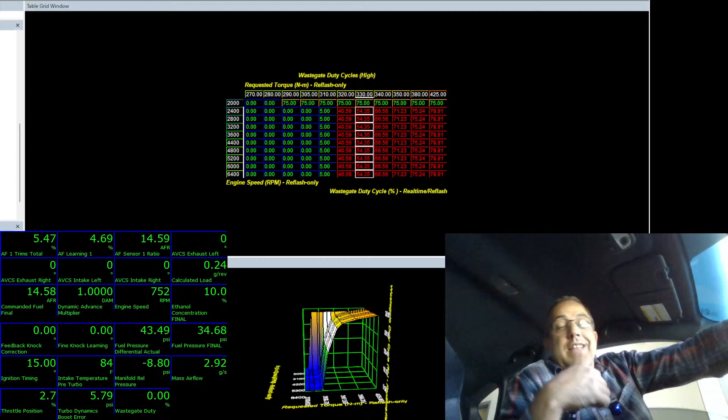But it's not a smooth, consistent laminar flow from the engine to the tank like it is from the tank to the oil pump, because it goes and hits things and it gets aerated. It goes to the heads. It's got to come down to various points to get collected. And so there's air and oil that gets collected out of there. So you realistically need more stages to remove the oil you're putting into the engine. And if you were to size it directly, you need, say, double or triple the amount of millimeters.

So in this case, a 12 millimeter wide pump, I would need 24 to 36 to get all the oil out, because the oil is going to be aerated and coming from various areas. I'm going to have air pockets and all that kind of stuff going in there, right? And then also I have blow-by. I have all the blow-by in the engine that's coming out, making it past the rings that I got to get out of the engine.

And ideally, you want to take that with the scavenge pump, and ideally, you want to bring crankcase pressure down some. You want to get it below atmospheric. The thinner the air is in there, the less molecules are in there for the crankshaft and the pistons to move around and pump and bang into. Again, if I stick my hand out the window on the freeway, the weight of that air blows my hand back, right? That's a load. I got to hold my hand up, right? The crankshaft consumes power pushing through the air.

The pistons, they literally displace air back and forth on the backside of them, pushing the air back and forth between each other, and between like the two in the middle, they go together. Then that pushes to the outside, and the back ones separate, and they push back, and the front ones come apart, right? So I have this air moving back and forth between the bays of the engine. The more there is in there, the more work that has to happen to move that air back and forth.

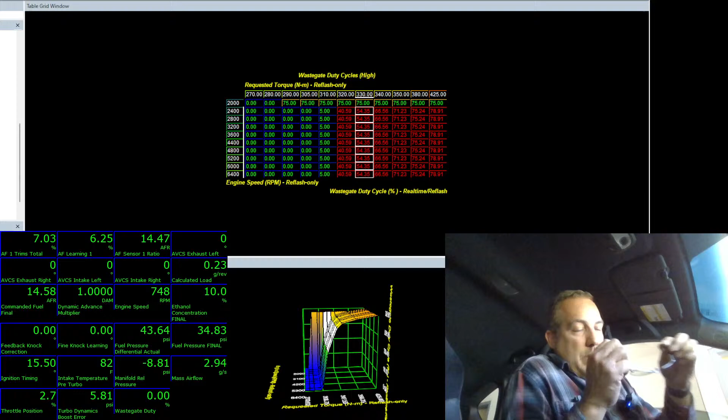The issue with that, though, is if I was to pull too much of a vacuum and there's not enough residual vapor floating around in there, then you have issues with wrist pin lubrication and other types of lubrication inside the engine. They say that vapor in there helps to lubricate things. I'm not totally convinced, but that's what they say. So probably if you don't have jets squirting onto your pistons or your wrist pins, I could see you having some issues with oiling. But even then, you still have oil shooting out of things and splashing around in there.

But they say less than 12 inches or 12 pounds relative, so negative 12 relative, you will strip the oil from wrist pins and that kind of stuff. I don't totally buy that, but that's something they say.

So anyways, yeah, I've got to have the ability to pull the blow-by out, pull the oil out, and get that out of the engine. And I have to do obviously clearly more than what the oil pump is applying to the engine in order to get all that out. So you've got to have quite a few more stages. And honestly, with my oil pump design right now, I don't know if my scavenge stages are going to be enough. I've been unable to test them as of yet.

So my scavenge stages are the exact same as my pressure stages, they're just more oil pumps, more 11 mil rotors. Now I designed it to accept a 12 mil, and there's enough room in there if I wanted to lay it back some more and put a 14 mil in there. No one makes a 14 mil that I know of, but I can have them custom made. So I don't know if my scavenge stages are even going to pull enough air to compensate for the blow-by in the engine yet.

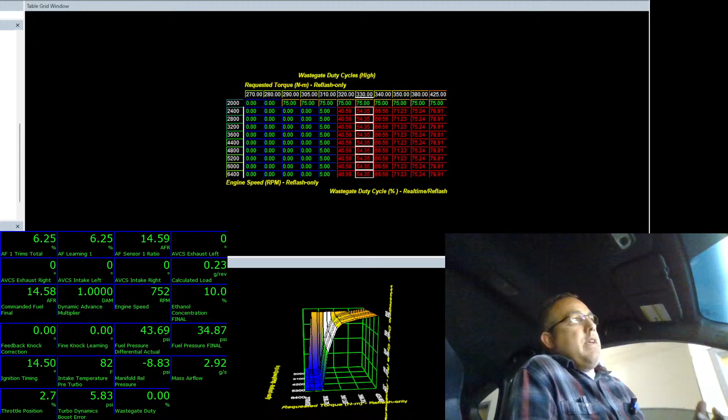So I could technically overdrive the oil pump if I want. If I have an 11 mil pump and I want to get 12 mil flow out of it, or 13 mil flow, whatever, I get a slightly smaller pulley on it, and it'll spin the pump faster, and I'll get more oil flow. So anyways, yeah, I've done a lot of thinking about that.

I do not like this. Now I've got a 7% total added trim, which is weird because I pulled it out of the MAF scale, right? Pulled it out of the MAF scale. So my issue is that on the top end, I am way richer than it's supposed to be.

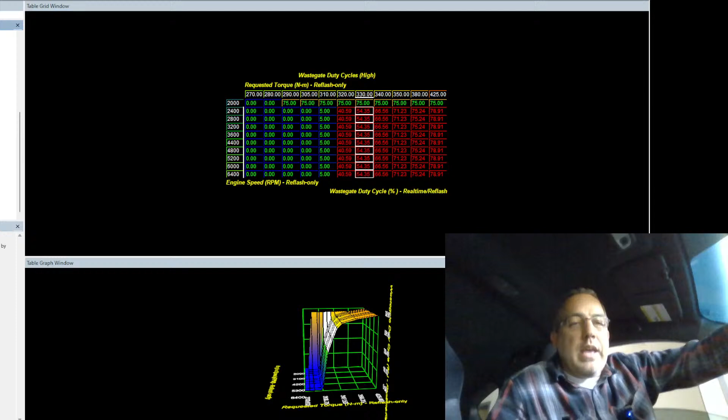And some of that is going to be this guy right here, this TPS-related fuel adder, right? But it adds 0.1, it's not adding a ton. It's adding 0.1, 0.2 based on temperature. If I go to the high switch, coolant temp right there, 220 - I'm not there obviously, so I'm down to 0.1. So it's adding a little bit of fuel to the target.

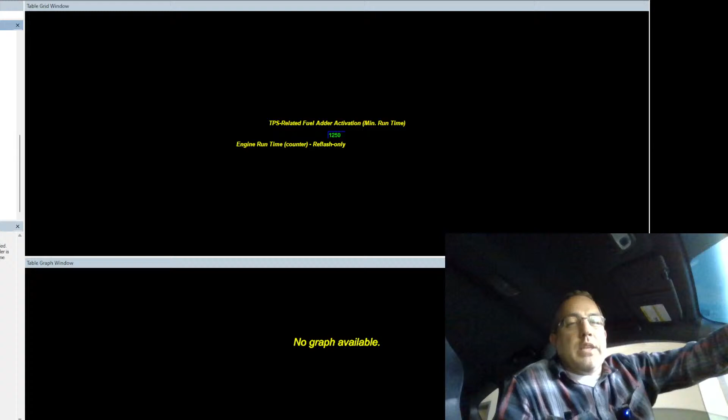But even then, this is still to the target, so it would show commanded fuel is richer. And in the case of this car, commanded fuel is a value, and the final number at the tailpipe is quite a bit richer than it should be. And if I check this one, that one, or that one, those are zeros, so I know I'm not adding extra fuel there arbitrarily. And then this one here is also zeros.

Some cars we play with this, some we don't. But this is, do we add or subtract airflow from the MAF based on the temperature of the air in it? Since this has an IAT relocate, it would be silly to change this, because the mass airflow sensor is reading the air at the sensor, and I don't think there's a point in changing that unless I want it to automatically richen with air temp, which we don't have on these and the fuel map here.

We don't get a big trim. So if we go...

Miscellaneous, we got TPS related fuel adders. I don't have IAT related fuel adders, right? I don't have that. I have open loop IAT related. I got accelerator, I've got TPS, I got coolant temp. I don't have air temp.

So what I can do, and I have done on many cars, is up here I'll take this and add a couple percent to the high flow areas at high temps. We'll say like 3%, and then go up here like this, and do that, and go like this to a normal temp. What that means is when it gets to 122 degrees on the high end, I've added 3%. That adds in some protection on the engine to automatically richen it up when the intake into the engine is hot. I could leave that right here because honestly, that's completely viable.

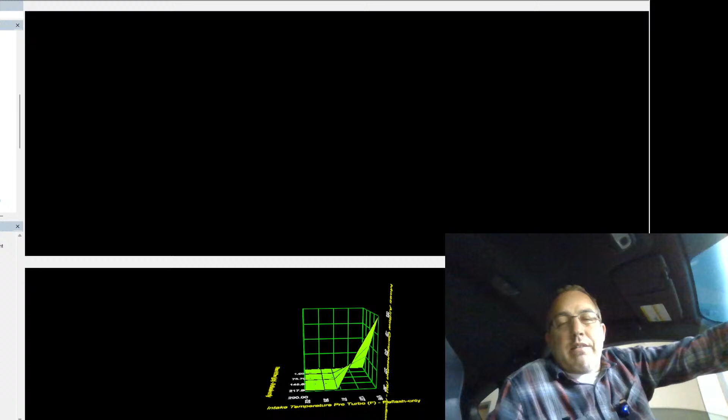It's merely safety, and I can go the other route too. If I want to, when it's cold, I can lean out a smidge—say I have it set up for a really rich AFR target in normal conditions, we'll say 10.8, and this is going to add some on top to protect it when it's hot. Then on the other side, when it gets cold, I can lean it out if I wanted to and bring it to 11.5, further from the knock threshold. I can pull a couple percent out of here if I wanted to.

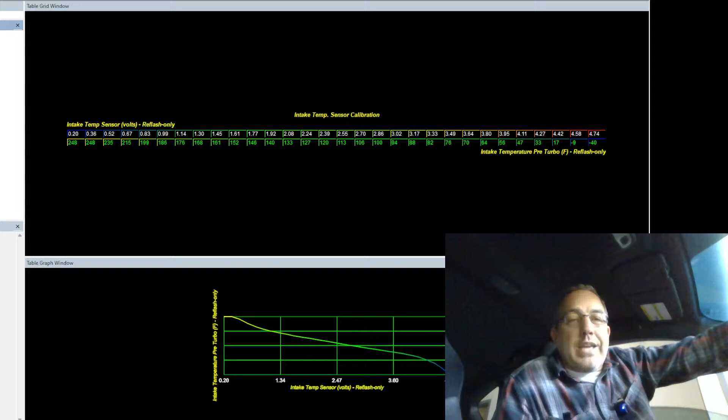But with this car, I am not in any desire to make it more aggressive on its own because it's already in a place that I don't like it to be. So yeah, but I'm going to check this to see if I'm going to do something in here that's messed up. Nope. Nope. Anyways.

How's the neighbor cat? Bit my lip while talking. Ow, bleeding, wow. I bit my lip good. Damn.

Neighbor cats are fine. Neighbor's got 17 cats. They're good, one of them came over and visited earlier today. In fact, it was a few seconds ago you heard a text—that was my wife texting a picture of the neighbor cat on our front porch to what we call the cruise crew. It's a bunch of friends that we went on a cruise with and do other stuff with too. So see, there's the neighbor's cat.

We fostered a cat for a week. I'll tell you a story, guys. I was picking up our cat, my wife's cat, from the boarder where she has to have medication twice a day, so we got to pay $20 a day to have somebody watch her and give her medication twice a day, and they often don't do it. But they hold her for us inside the kitty condos there. I go there, I see this cat.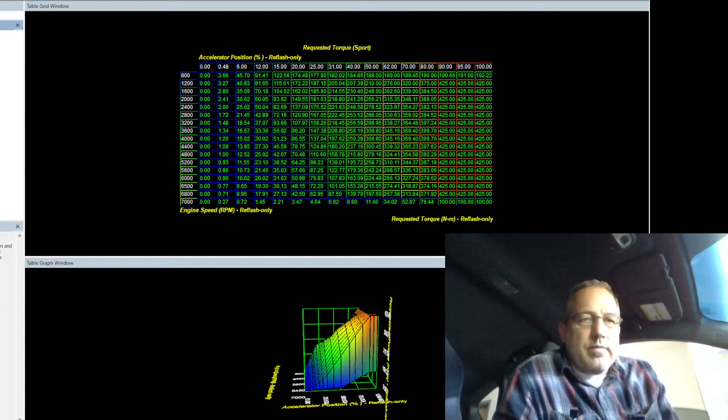Yeah, just generic maps. This thing should make tons of power up top, though. I can change this to 17. Let's knock this down a little earlier. 17, that might, oopsie, that didn't work. It might give me a little bit. It may be much.

Initializing tables, initializing tables, initializing tables. Always initializing tables. Oh, Jesus Christ. Oh, Lord.

That whole thing where Windows 11 changes the active window all the time, running in the background? Boy, that's so annoying.

I want to buy a new computer that has Windows 10 on it. And I guess I can install it myself. Probably what I should do. I should probably try putting 10 on this computer and see if it worked better. If I could find a 10 copy, that'd make more sense. Who's got the Windows 10 freaking deets? Okay.

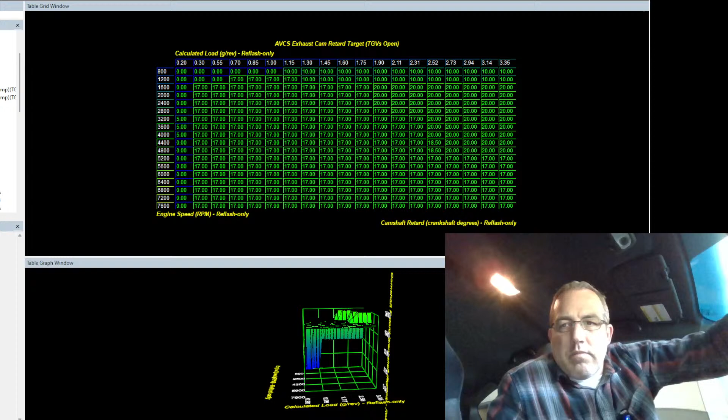Dude, screw you Google. Sign out of this account. I don't want this account on my thing.

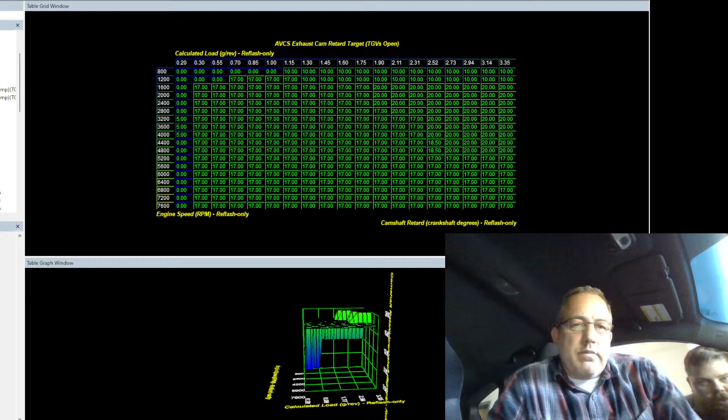Is that like the other WRXs that weren't making power? It is weird, right? Nothing's been making power lately. Nothing's been making shit. Is it the dyno then? Have we ever greased this dyno? Has anyone done it recently? No, you have to take it completely apart to grease anything. Yeah, so it's been like two years then.

No, because it wouldn't have full boost at 4,500 RPM on a factory VF if it was the dyno.

It's just fucked. So is there something wrong with the turbo? Yeah, something, turbo, car, I don't know. I spun the turbo, it spun fine. I don't know, wastegate crack maybe? Maybe it's got a massive wastegate crack in it. It did have a tiny one. They had a crack, a tiny one. Oh yeah, it wasn't big.

I don't know, but it's on a top mount still. There's no reason why a VF should hit full boost at 4,500.

It's on the Cobb map? Just off the shelf map? Yeah, all of them, doesn't matter. Oh fuck, those won't even make boost. There's not even a duty cycle inside the maps for it to make any more than like 12 pounds of boost. I'm at 78% to just touch that 16 right there. That's usually enough to hit 19 or 20 on an STI like this.

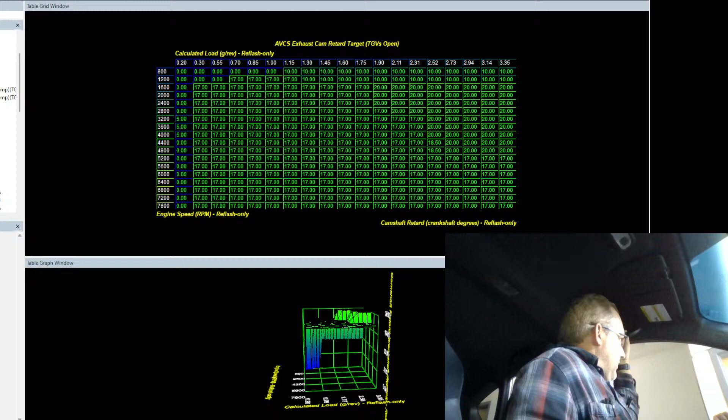Want to get in boost control and let me see if the rod pushes? Pull once it gets... yeah, but if it didn't, I'd have high boost. Well, why is it stuck that way? I can only move it a little bit. Stuck open. No, okay.

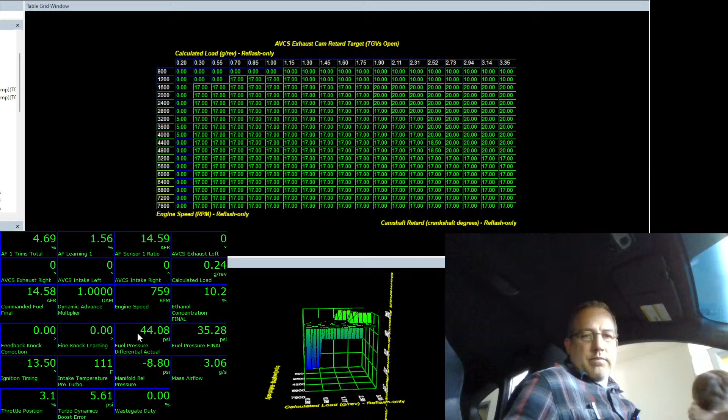The only other thing I could think of is maybe there was like a giant packing peanut in that Cobb downpipe or something stupid. Oh, like in the cat? That'd have burned up by now. That's what I would have thought. Yeah, all the heat, it would have smoked by now.

Oh, look at that. With the hood up, no air on the intercooler, the fuel I added with high IAT worked. See how it got hot up top? See how you got richer? That line got down closer to the lower tens. I just set up a thing where if the temp gets hot leaving the intercooler, it'll add extra fuel. Perfect. And with the hood up and no air on the intercooler, guess what happened? It got hot.

So that worked. But yeah, I know the last three cars have been really bad. Yeah, that one FA was really bad. Maybe made more power than this. It did, it made more power than this. That's true, yeah, that is interesting.

This thing might need to be lubricated. Oh, I didn't like that cam change. Oh, that's the heat, that's the heat. Yeah, yeah, yeah. The other thing too with that one is I add to the math cal, so what it does is it lowers timing as well when it gets hot automatically, with load. Now it does it doubly, I guess, because it does it also based on timing.

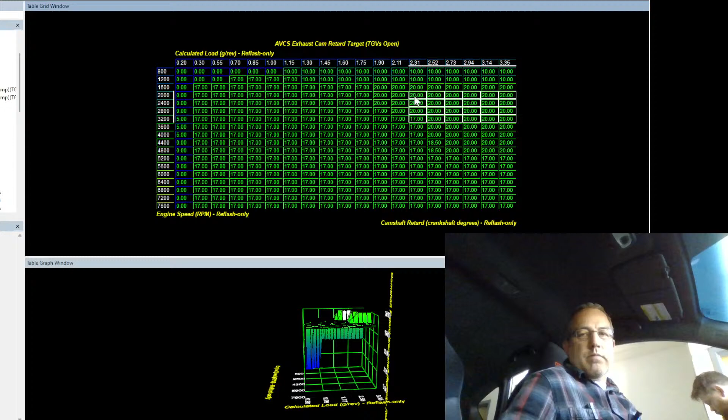I don't know what to make of that. Yeah, I'm not a fan. I mean nine times out of ten, when I push them harder than I feel like they want me to push, they fail.

Got brand new spark plugs in it. Doesn't sound like it was misfiring. What have you got for plugs? Sills.

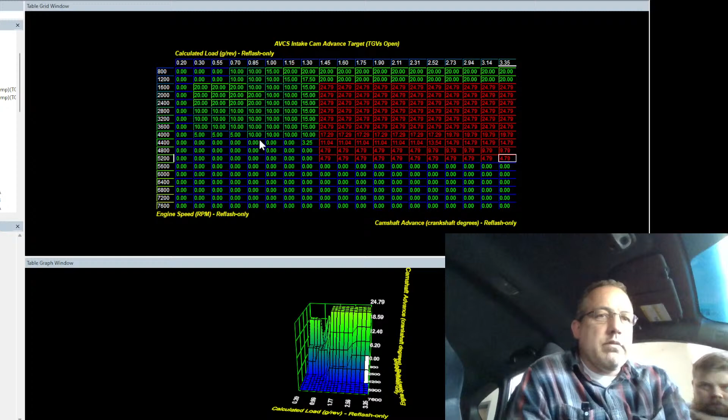If you went to 100%, just see an overboost. I went to 90. Went to 90, didn't do shit. What if I went compressor to gate and just see if the turbo's working appropriately? Yeah, I zeroed it out and it made the exact amount of boost it should have. Okay. I zeroed out duty cycle and it made like it was supposed to. Everything was fine, it's just not making boost.

Also, I'm kind of upset. With what? Pulsar only makes V-band reverse rotation turbo, not T4 twin scroll. Oh, the reverse rotation one's only V-band? Well, that doesn't matter. If it's the same mounting as something else, you just swap for a housing that works with it. If it's a clone of something, the mounting's probably the same, right? It's just a G series, but I don't know if they make a T4 G series reverse rotation. Ooh, they might. Genuine Garrett might make it. I didn't think about that. T4 twin scroll in reverse rotation.

Why would you want that? It's the only thing that fits. In what? The rotor. Oh, rotary. Gotcha. What do they make for reverse rotation in Garretts? I haven't checked. I've only been looking at Pulsars because I can't afford it. Well, the exhaust housing is more expensive than the entire turbo from Pulsar.

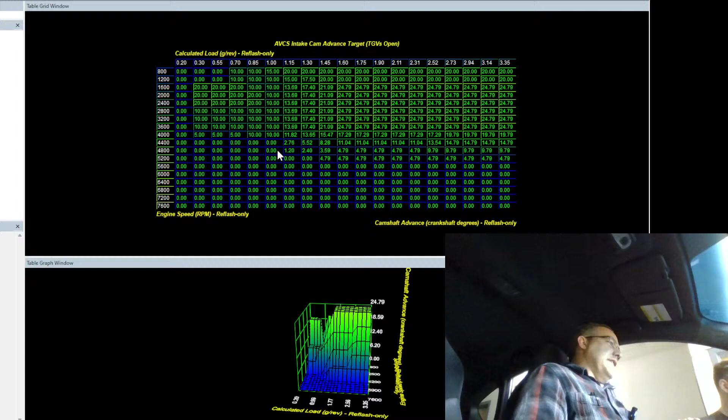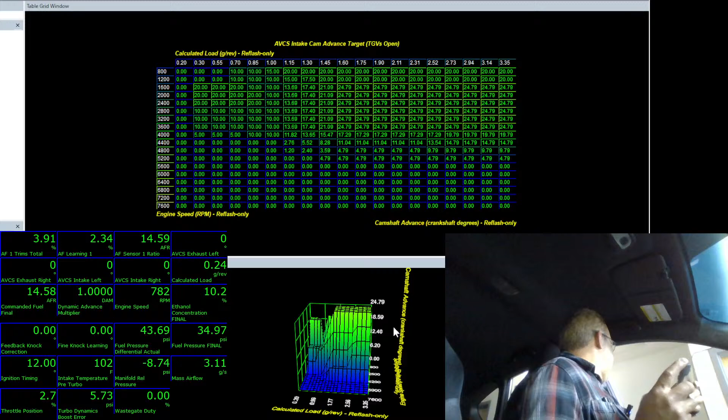All right, I spooled a little bit earlier, but wow, I got a lot of hot exhaust smell right now. There's got to be a restriction here. That's got to be what it is. Yeah, I got the boost coming a smidge earlier with those AVCS changes, but now peak boost is 4,300. It's a little fatter sooner, but still not great. And the power didn't go up any.

Ignition timing, 12 at peak. Intake air temp screams up. I got 230 grams. That's it, man. This thing is just not moving the air. 22 degrees. That's still 22 degrees. There's no air moving.

Let's see. I think I have Windows 10 for workstations somewhere. Buy a key. Can you even get keys? Maybe a downgrade option in your license? If that actually existed, that'd be awesome. I doubt there's a downgrade option. Why would they do that? They bug me every day on my other Windows 10 computers, like, you should go to 11. No, I don't want to go to 11. But they do it all the time.

This has got a Cobb catted downpipe in it, yes. But it's brand new.

It just got installed. Some choking on the airflow, higher. Yeah, we believe that there is. We're trying to figure out what it could be. It definitely acts like there's a restriction. So it could be the catback. The catback could be clogged as shit for some reason.

I don't know. I might have him unbolt the catback and just run it fucking straight downpipe and see how much the power goes up and the spool goes up. I mean, that always wakes up a little bit, but if it wakes up a lot, then we're like, okay, there's something going on. Man, look at that.

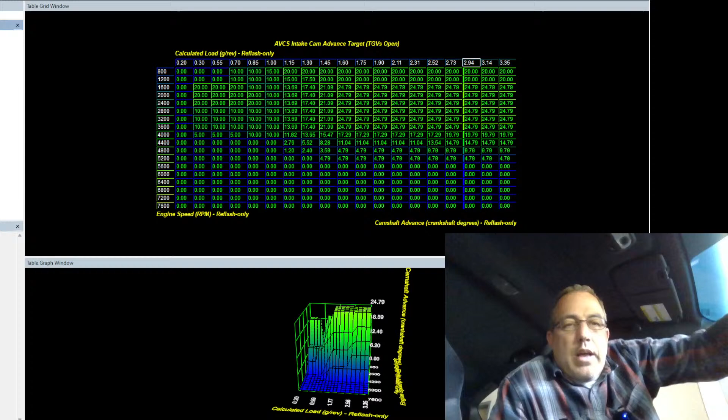So yeah. All right. I don't know what else to do with this thing other than unbolt the catback and drain fuel out of it because it's 3/8 of a tank. So I think I'm just gonna call it quits here, while we try and troubleshoot and figure out what's going on. I don't know if it's just a tired turbo or tired car or what. It's only got 86,000 miles on it, which isn't terrible, but it's definitely not nearly as responsive as it should be. And also, Mark, you said choking it up on the higher flow.

Well, it's not just high; it's low too, because the peak boost isn't coming until 4,500. And on a VF, that usually indicates you got a front mount or a broken VF. And this thing's still on a top mount, the factory top mount. So the factory top mount with an upgraded inlet, upgraded intake, upgraded downpipe. This thing should be spooling way faster, like peak boost at 3,000, not 4,500. So there would have to be a restriction the entire way, not just on the top end.

So, anyways, this is probably a spam call. Let me answer real quick. Let's find out. Unless it's Sean. Hello? Hello? It's blank. Nobody's there.

Yes, it was, but they don't use rags here, so nobody puts rags in anything. That's a big no-no because they do get forgotten at times. So they don't do that here. They don't even have rags here. Let's put it that way.

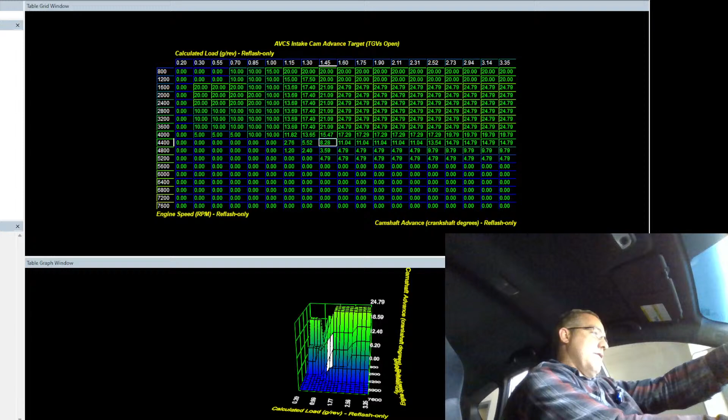So gonna take the downpipe off, or the catback off. I think if we can reach under there. He just put it on, so it should be easy to get off. I think we undo it, let it hang, and then do a pull with a straight downpipe and see how well it does.

I'm gonna call it quits so that I can take a piss, and the guys can work on it, see if they can figure something out. And then if I do figure it out, or they do, then maybe I'll do a quick little short video showing what we did, and all that kind of stuff.